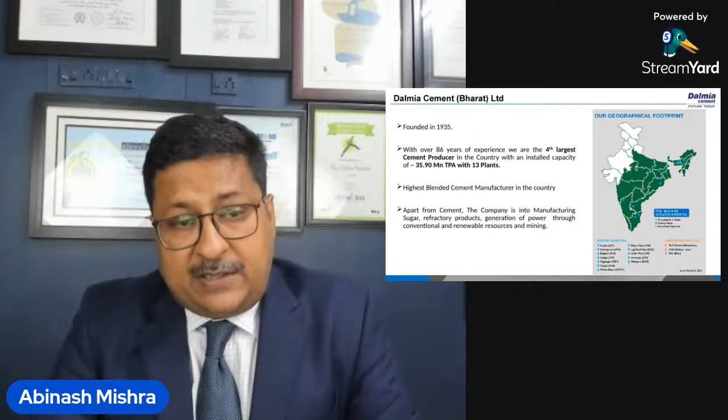We are India's number four cement manufacturing company. We are now at 35-36 million tons capacity, planning to go to 40 million tons in 2025 and 130 million tons in 2030. But the only premise we are working on is we want to be the company producing 100% blended cement. We are the highest blended cement manufacturer in the country.

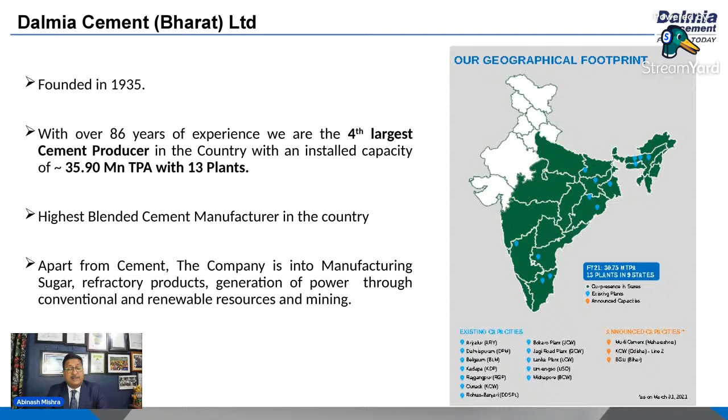Apart from this, we also believe in getting into a sphere which nobody can compete with us in terms of technology. You must be knowing that CDP declared in 2018 Dalmia Cement to be world's greenest cement. So we always take pride when we talk about green, less carbon emission per metric ton of clinker or cement produced. This is a brief accolade of our company. We were founded in 1935, and till now we keep growing and going on excellence.

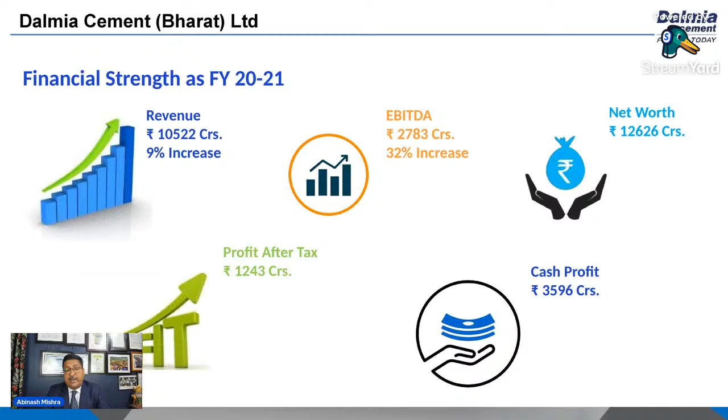We produce Portland slag cement, Portland pozzolana cement, composite cement. We also produce OPC, but very, very scarce. Sulfate resisting cement, oil well cement, and railway slipper cement are special class cements. These are needed when the customer wants specific specifications covered, based on the requirement.

And now, moving from gray to green is our corporate slogan. Now we are moving towards green. How it is happening, I'll showcase in the next slides.

If you see World Business Council for Sustainable Development, WBCSD, or UNFCCC talk about COP26, everywhere you'll find that our company is participating, advocating about less carbon footprint per ton of cement produced, where we are the lowest. We are at 395 kg per ton, and we are further working with AFR and other initiatives to lower it down to around 300.

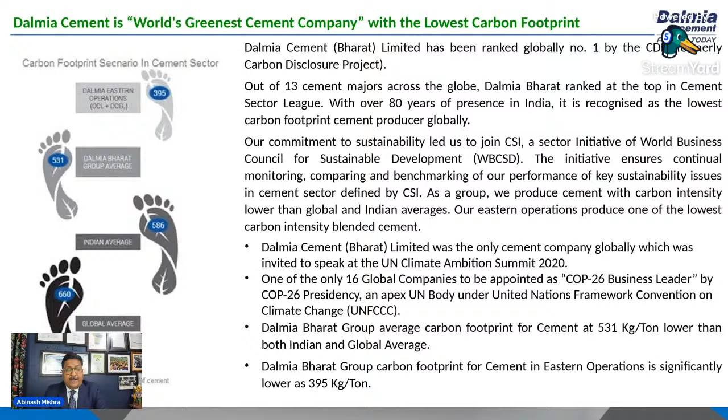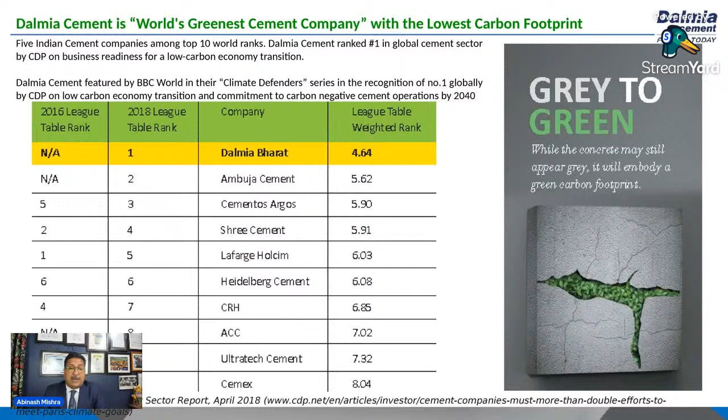You can see CRH being one multinational, Cemex, Heidelberg also, Lafarge also. Many companies are striving towards excellence, and we are keeping our commitment to save Mother Earth, being a sustainable green cement manufacturing company.

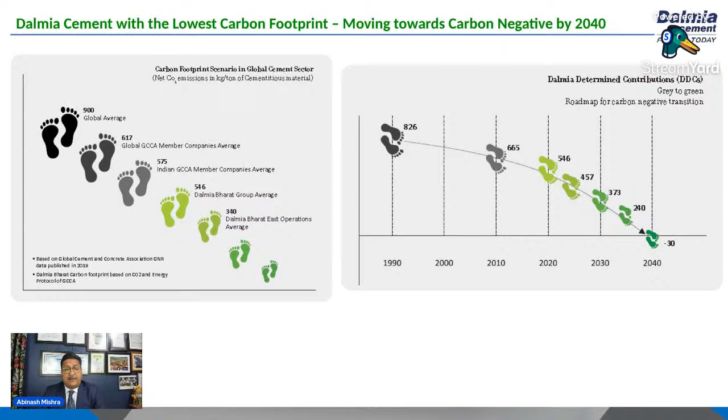Next, these are a few data points which we can also share with you if you are really interested to know how the carbon footprint is reducing year after year, and how we have planned till 2040, how we are going to be carbon negative during 2040. What is our commitment? All these things are available on the website, but we can also share for your academic interest. We have committed that we will be carbon negative by 2040.

Just to complete this thought: I'm also a civil engineer, a PG construction management candidate. I can go to you and we both can construct the project with whatever specification has been given. But who is going to initiate the journey of excellence? It is us, or the person who is following specifications that are 20 years old and all those things.

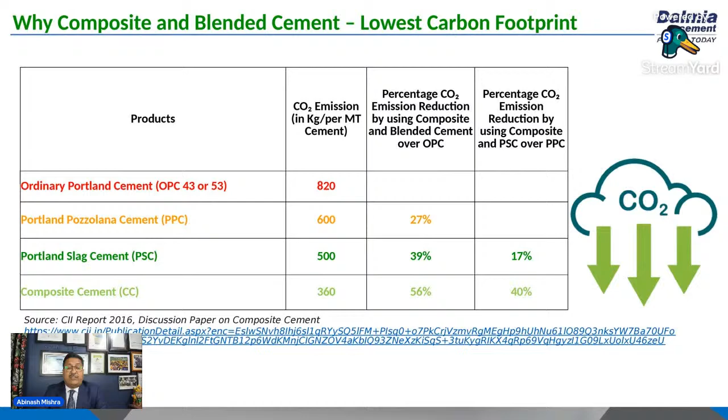So those things should be kept in mind, because from 2010, 2012, 2015 onwards, the journey of millennials has come. We should not be left behind on a knowledge basis when we are old, creating our own legacy stories where those stories don't hold any water in terms of real addition to society. So I always take a lot of pride when I do something that is going to reflect on my legacy after 10 or 20 years of my life.

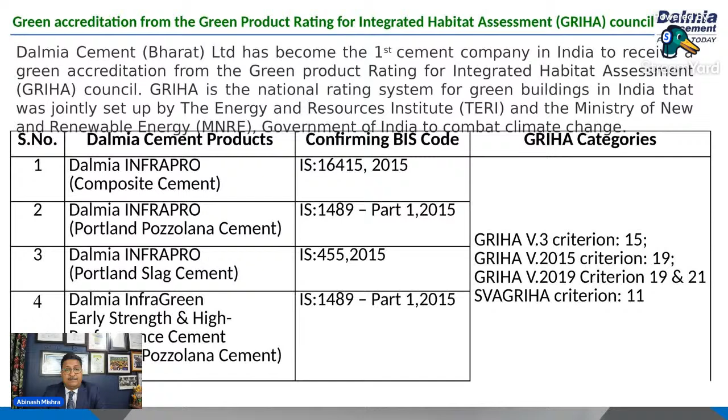And to add to the accolades, we are now Griha certified manufacturers. Our brand is Dalmia Infra Pro. You must be seeing at the sites - Dalmia Infra Green, which is early strength, high performance cement used in airports and metros, and this slag cement, Pozzolana cement, composite cement - all these four products are now Griha certified products. These are all Griha Council certificates we wanted to showcase with pride. And we are also a green product of the year, and we have got that GreenPro ecolabel stamp for all these four products.

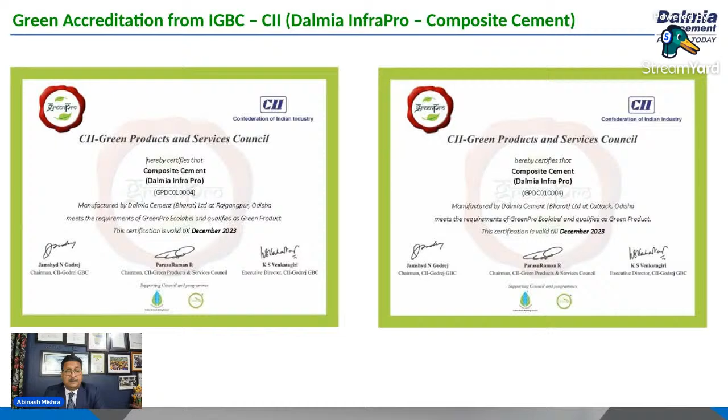Okay, so enough of talking about our product and company. Now, the intention of this discussion we found that, why composite cement and blended cement is needed when we have got OPC, and we can mix any other thing, or else we can construct anything with OPC. If we go through the microstructure of

This composite cement is only 4 or 5 years old in this country. Before that, this code came into practice. Nobody was interested to use composite cement, thinking that it might result in early strength or latter age strength issues. But believe me, we will show you certain cases where we have used composite cement with required amount of high range water reducers and superplasticizers, and we have found that it performs better in many cases - better in later age strength or mid age strength compared to OPC plus fly ash or OPC plus GGBFS. That we also can share with live data in future. Next.

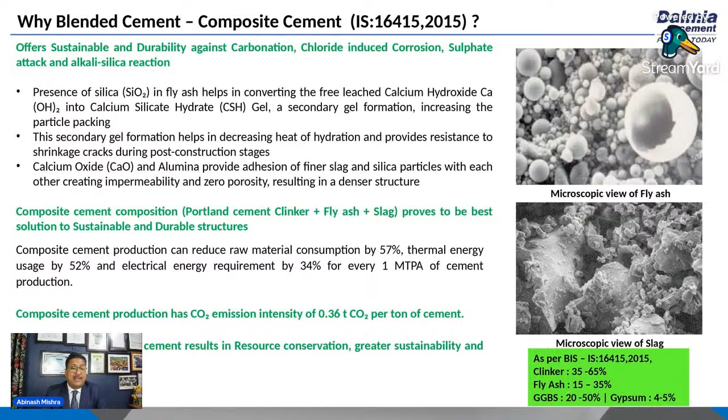We all know that calcium oxide, when added with water, it comes out with calcium hydroxide, and CO2 gets released. Whenever we see lime leaching, we always blame on sand or sometimes blame on something else, but the real thing to blame is high free lime content in that matter. It might be plaster, it might be lintel concrete, it might be full depth concrete, something which has started leaching with calcium hydroxide, and we cannot help it. The only thing that helps is the reaction of silicon dioxide or silica content in slag. When it is ground to reactive level, it creates calcium silicate hydrate gel, and that is a dense density building product in the concrete or the cement sand aggregate mortar.

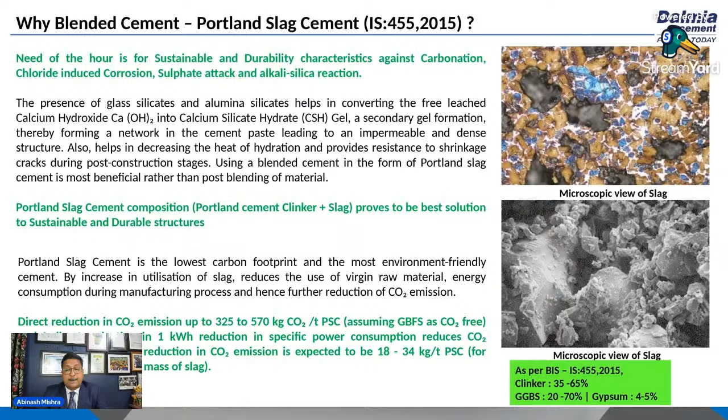less harsh with adjusted quantity of admixture. So the question is whether we are going to continue with OPC cement and fly ash, which doesn't have a method of control of total sulfur content, total trace mineral content, total metal content. We do not have anything - we just add and make the concrete and say, make it set so that it produces a structure as governed by codes. But what about durability, concrete cover life, and others? Here, if you use PPC cement at your site, made with graded fly ash, tested and pre-prepared to survive weathering conditions, it will definitely add value to you. Yes, there are questions - OPC plus fly ash gives good cost benefit. It doesn't give good cost benefit.

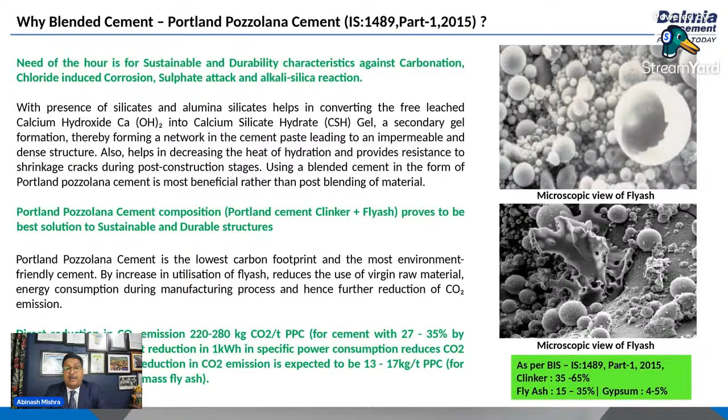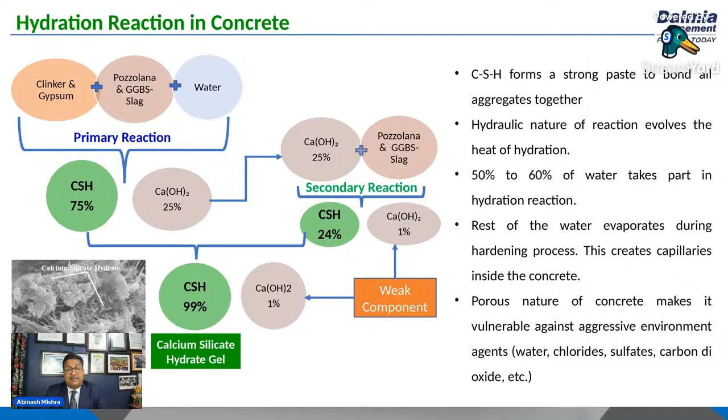This is internationally proven. You can see with your own eyes when we see permeability test on long term, and this is part of codes and standards now in many international standards, and India also is going to come up with it.

It is our responsibility to ensure that the concrete has to be impermeable, and we do not want to add admixtures or IS 9103/2645 to make it more denser. So we call it waterproof concrete and all - it's not needed if we do it properly with the mix.

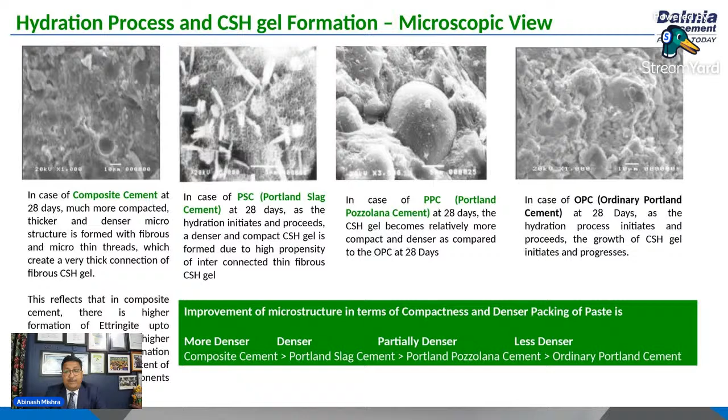Next, and these kind of proper grading of inter-particle size distribution creates very good packing density.

You can see and witness many good results which have been on the internet for the last 10 years by Dr. A.K.H. Kwan of the University of Hong Kong. He also has been working with packing density for the last 20-25 years. And in blended cement, when cement is prepared sparingly with the right kind of supplementary cementitious material or fly ash or slag, you will find packing density can be engineered. And believe me, this packing density gives concrete a good life.

And that's what is the responsibility of a quality engineer, a site engineer, or engineer in charge at site - always to be.

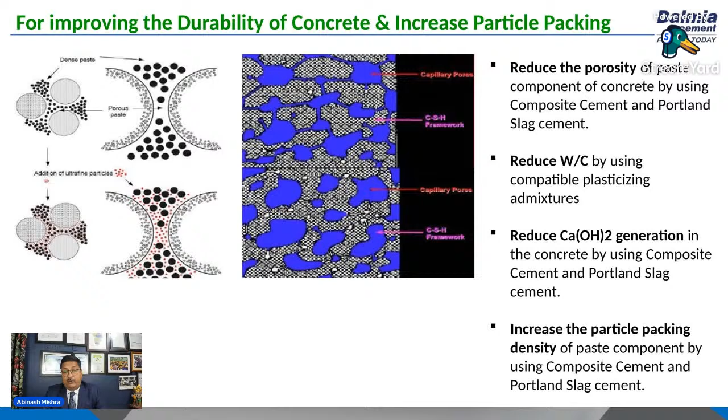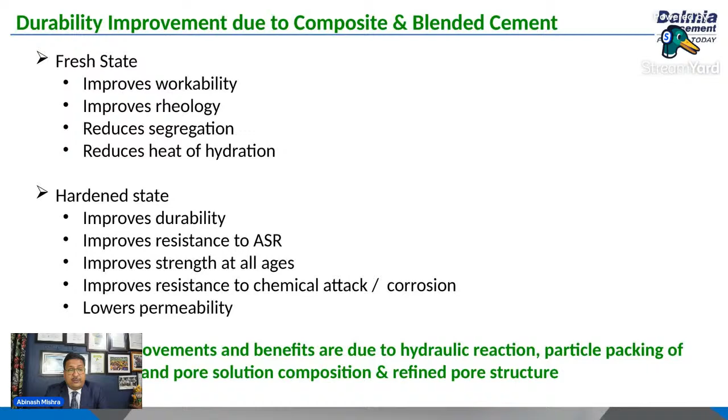And these are all when blended cement is used - I have been saying this alkali silica reaction improves resistance because of density, having more silica in it, having secondary reaction and all. And lower in permeability - we have been discussing almost all these points in the last 2-3 slides while talking about the density.

So from this point onwards, I would like to request Ramanjeet Singh Walia, who is our national head CAM concrete technology. He has been with us for a quite long period, and he has been doing a lot of site-based research, not lab-based research. So he will share the findings of third party tests we have conducted, and then take you through the very important case studies on high grade and moderate grade concrete. I sincerely thank you for giving time to listen to me and see the slides.

I would like to answer both of them shortly. Number two answer is, I really compliment the idea, and our invitee's resonating, because I have been seeing a lot of shift and requests by tier two RMC units where we are requested to send slag cement or PPC cement to them because of the obvious reason - customer wants everything to be used as packed, as spick and span, not from bulk or GGBFS or fly ash, because of those unknown reasons to us where he doesn't believe or something like that.

It is happening, and we are getting a good response. We can share with you the slag cement and PPC cement sales from India's best of the best RMC plants, even in tier two, tier three cities of the country, because of these reasons.

First one is, yes, we can produce high strength, high performance concrete with slag cement, with PPC cement. We have got a product which is engineered from source. It's called beneficiation of clinker to perform and give you. It's a blended cement - PPC and blended cement PSC - only patented cement in India, which is called Dalmia InfraPro, and that gives you 28 days strength in 3 days, and it can reach M120 grade, M100 grade also.

We have conducted trials and we have got results. We can do it at your site. You can take the sample free of cost, and we'll support you to do that.

Apart from that, normal slag cement and PPC cement also can give you M100 grade concrete. It has been done near old passport office in Worli in Mumbai during 2009-2010 for Raheja Revanta project by Samsung C&T, where I was concrete team leader for preparing M100 grade concrete when I introduced ultrafine GGBFS to the country.

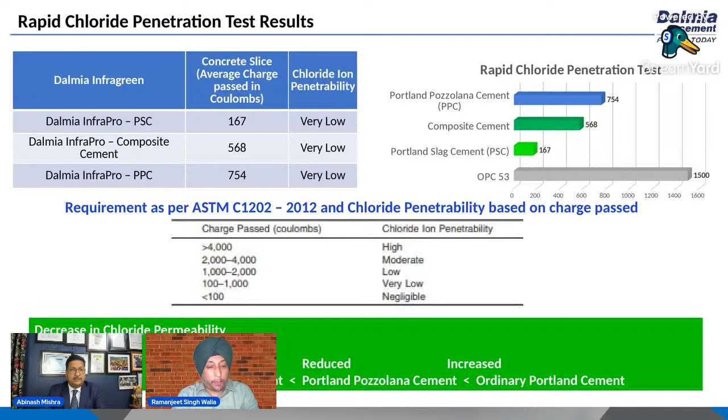Yes sir, so as sir has told nicely about the blended cements, and as the topic suggests, breaking the myth, we in the construction industry - as I am seeing in these questions also - can we use blended cements in high grade concretes and all. So these are some RCPT test results which you can see.

With PSC, it is coming 167, which we would never have thought with OPC. So this shows what is the strength of this cement, and how much durability we can get with this cement. And when we are going into high grade of concrete, we need to keep a note of the heat of hydration and also the packing density. So these blended cements have been proven that they have a lower heat of hydration as compared to OPC, and also better durability.

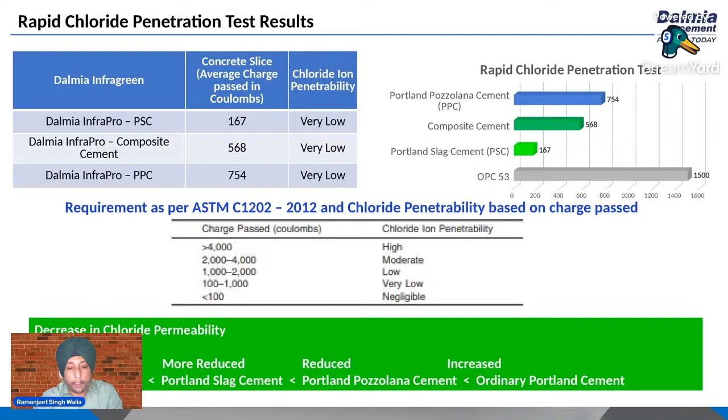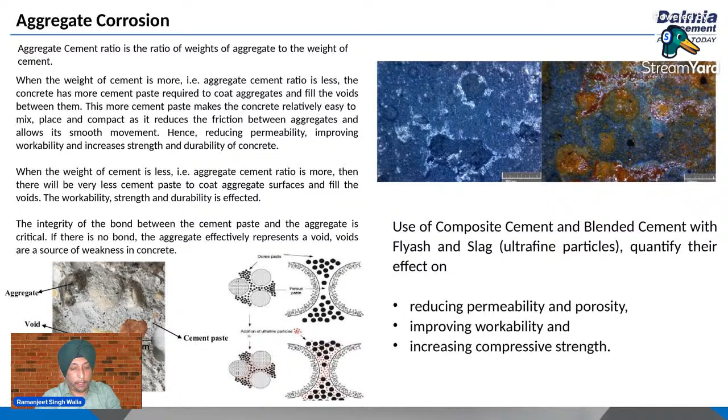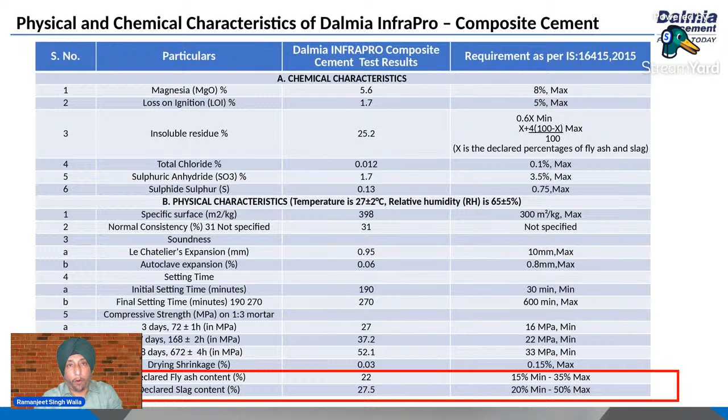These are some differentiators where the results of composite cement you can find it at our - we can send you our MTCs and all other third party test reports. This is for composite cement.

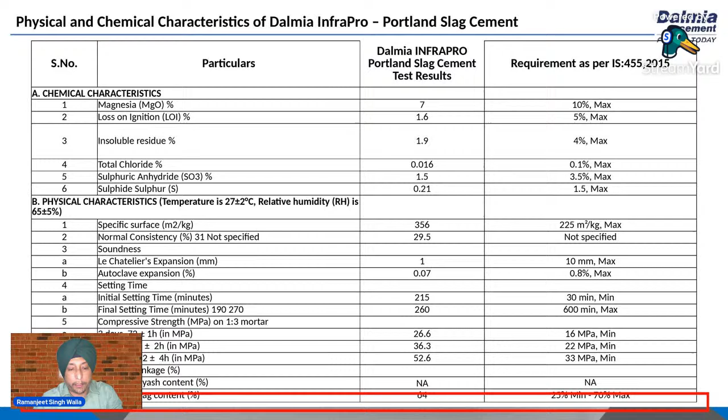Same is for Portland slag cement - PSC, we are the largest producers of PSC in the country, and we are supplying to very national importance projects like metros and others, we are supplying PSC. Due to this durability only and better strength requirements, they are using PSC. And these are some of our proud customers. Same is with PPC.

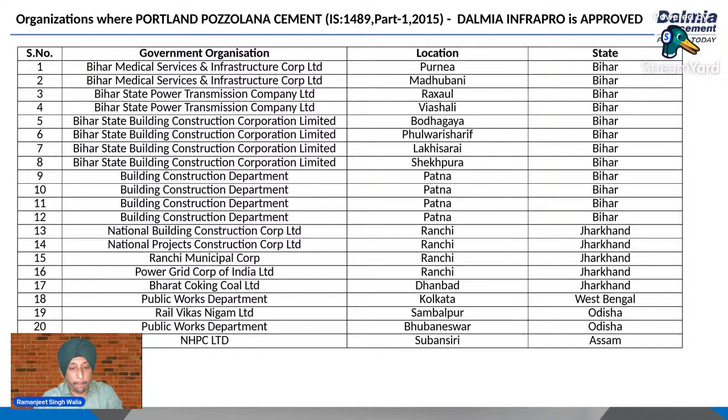Yes, we have successfully used blended cements in aerated concretes also, and also in early strength requirements. There is a myth that using blended cements we won't get early strength, but we have used them successfully. You will see in my next slides that we have used this cement for early strength requirements.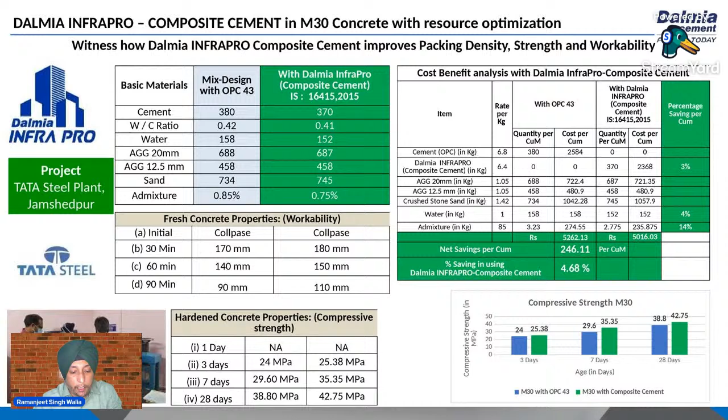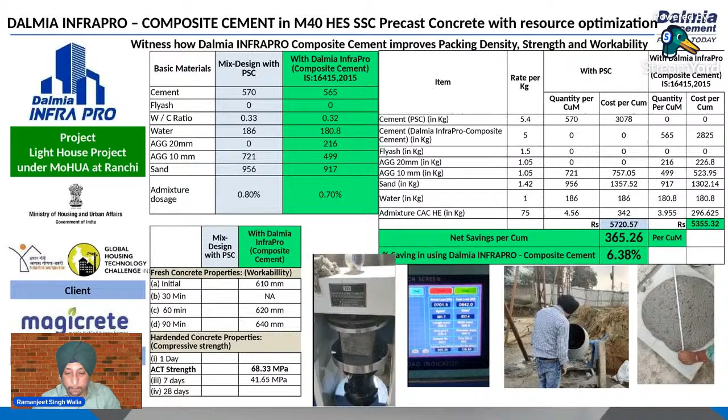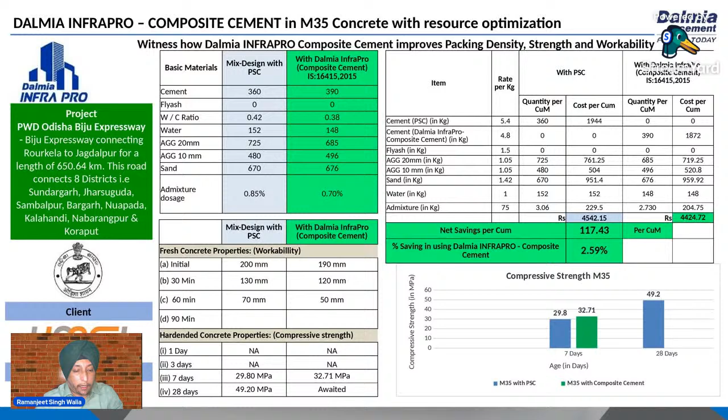This is one more study with our composite cement, M35 grade, in a highway project. Here we used 390 kg of cement. If you're able to read the slides, the water requirement of these cements is lesser than our OPC cements. That's why we are able to get better strength, and also the admixture content which OPC requires is lesser here. So this is M30 and M35, two grades we have done.

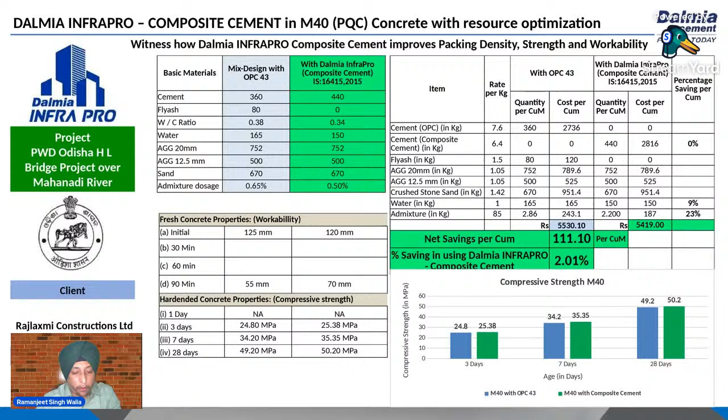This is a bridge, HL bridge in Odisha. Here we are successfully using M40 grade in PQC with 440 kg cement. We are getting 50.2 MPa in 28 days.

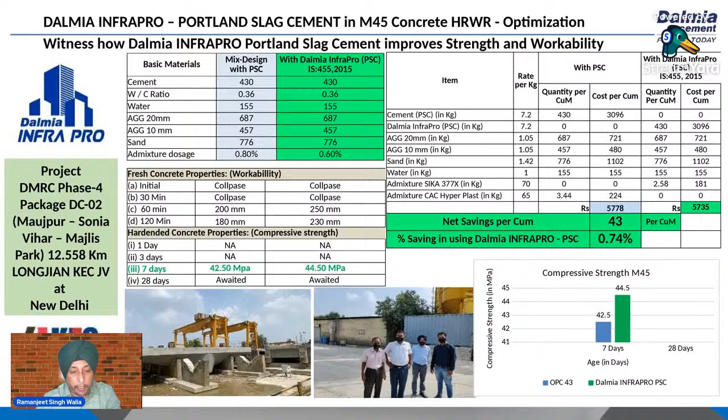This is DMRC. Here we are using 430 kg of our PSC slag cement, and our results are very good. Even in all the projects in DMRC and NCRTC, National Capital Region Transport Corporation, it is being used.

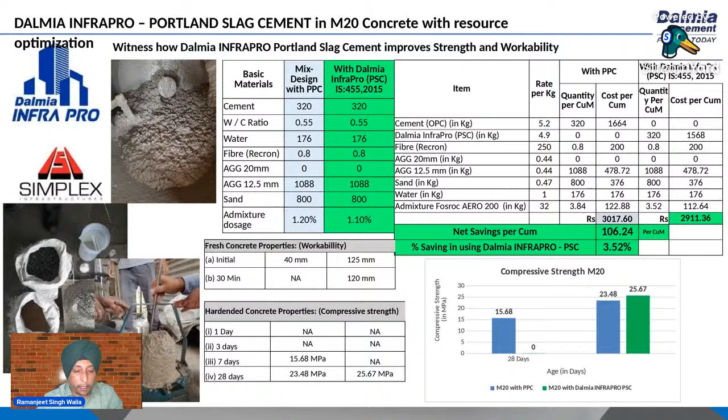This is NTPC Tandwa, this is fiber reinforced concrete. They were earlier using PPC but we suggested they use PSC in place of PPC. You can see here that with PSC they are getting the desired workability, which was a bit difficult with their previous PPC cement, the other brand cement they were using. They achieved strength as well, and they have now approved this PSC.

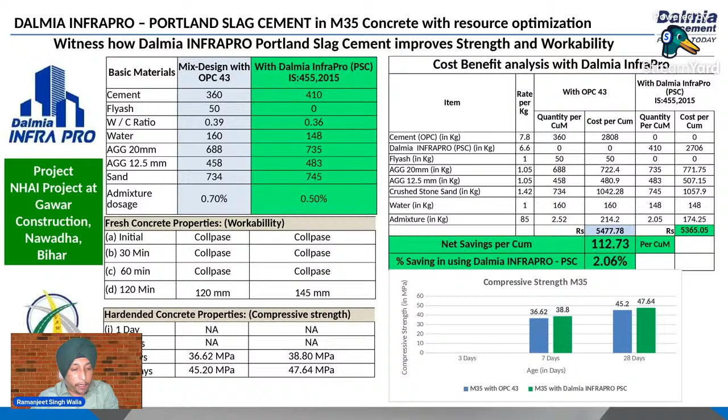Now they have started trials with composite cement also, and they are getting good results. The workability is also better with the blended cement compared to the site blend, because with 0.5% admixture we are getting 145 slump in 2 hours, whereas with the OPC plus fly ash blend they were getting 120 slump, and the mix was also harsh.

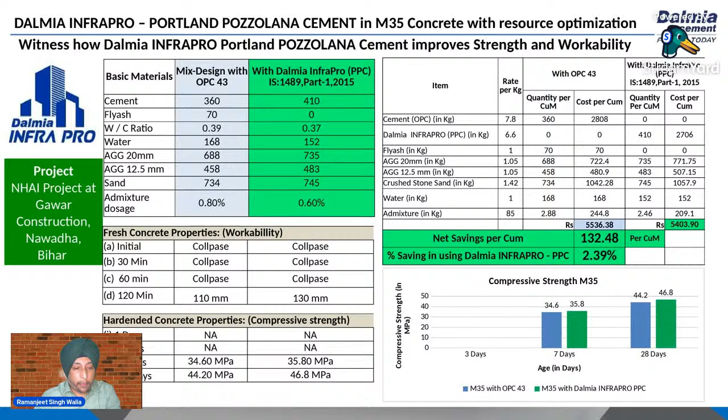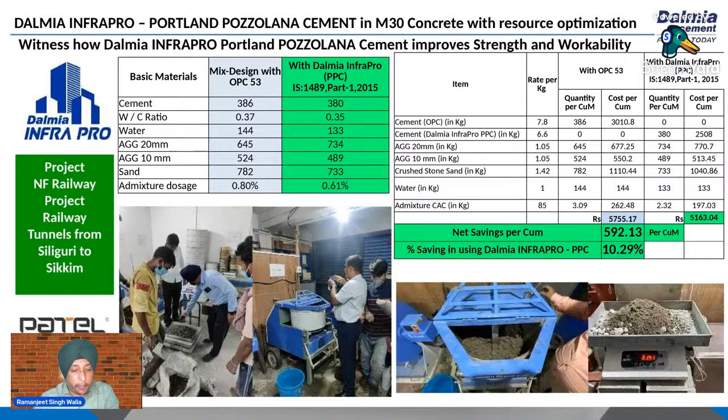Here we have done a trial for M30 with PPC, with 380 kg cement, and they are getting excellent results with respect to the setting time, as the setting time plays an important role. Earlier they were doubting that they won't get the setting time in the blended cement, but the blended cement proved to be beneficial for them.

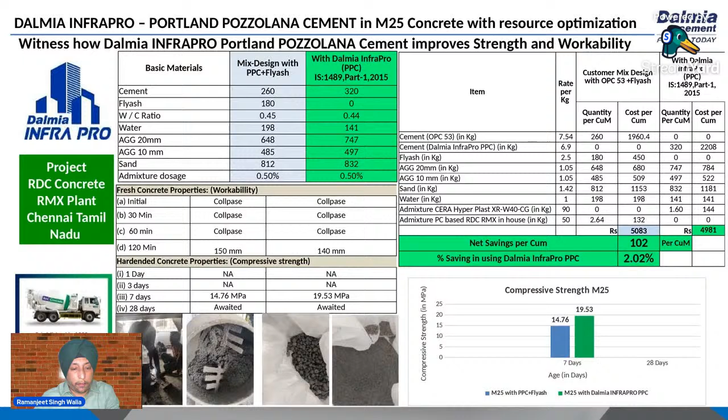This is another project in the same package, at a metro project in Chennai, where the client is taking concrete from RDC concrete. Here also we have done some trials for M25 and all, and they are now using PPC. So that's all.